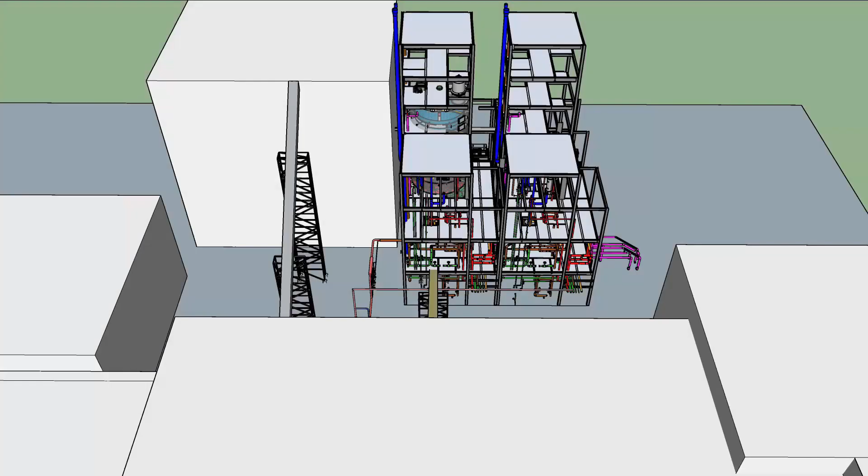In this episode, we'll be focusing on aspects within the extraction plant, from heat exchanger optimization to steam system improvements, all of which came to light through the insights and power of CLARITY. A focal point for CLARITY in extraction was a shell and tube hex that was one of the largest consumers of indirect steam in this stage of the process.

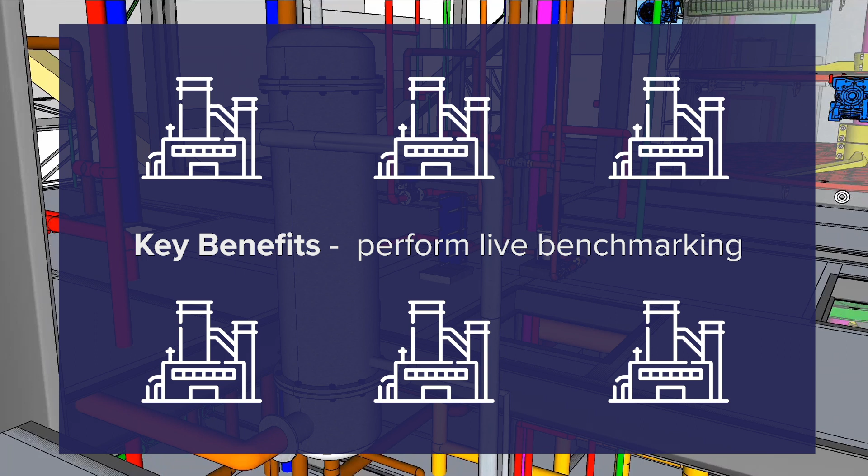As CLARITY was rolled out over multiple sites across this client's organisation, one of its key benefits is being able to perform live benchmarking. Before CLARITY went live, Crowley Carbon targeted big energy users like this hex and installed additional instrumentation to capture an in-depth view of the process. This involved installing a dedicated steam meter alongside pressure and temperature sensors before and after the primary and secondary streams.

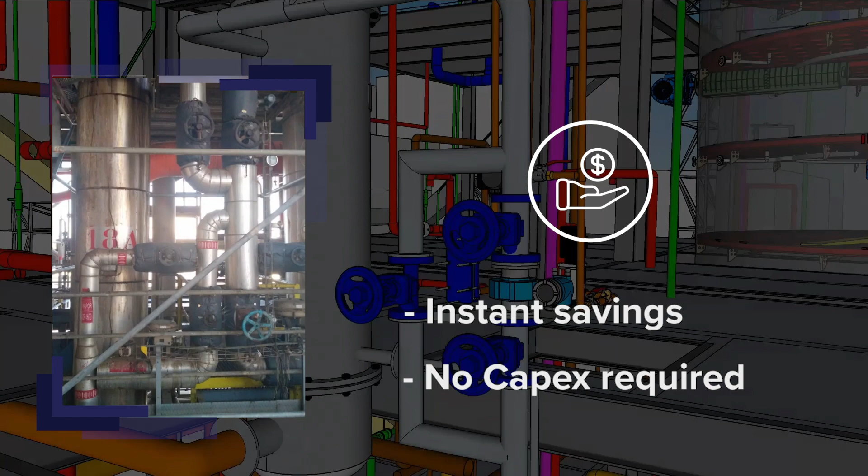Immediately when CLARITY went live, instant savings were realised with no capex required. It was found that multiple sites with the same product throughput were consuming different levels of steam via the hex in question. After just a short analysis, it was found that each site was controlling the micella stream at different pressure set points through the hex. The site with optimal running conditions was immediately replicated across the other sites, and the lowest savings achieved from this action was €53,276.

By modelling the process around this hex and trending how it should be operating, it was found that there were further savings to be achieved as it was still consuming too much steam. The hex was increasingly becoming fouled between shutdowns where it would ordinarily be chemically cleaned. With the insight of CLARITY, we were able to pinpoint when and how the hex was fouling. On average, these circumstances only occurred 5 times a year, but had huge impacts on steam consumption.

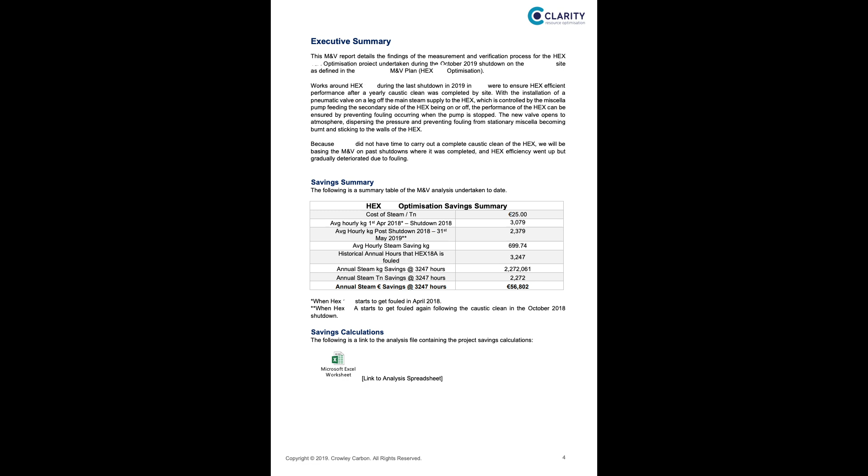It was found that when the pump supplying the micella was stopped, the steam supply was simultaneously stopped. This led to a pressure buildup within the hex, which burned the stagnant micella to its walls, decreasing the surface area available to heat the micella during normal operation. Because of this, an increased level of steam was consumed to reach micella temperature set points. To negate this, a pressure relief valve was installed and would open to the atmosphere when it received a signal from the micella pump that had stopped. The minimum cost saving on each site for this action was €56,802.

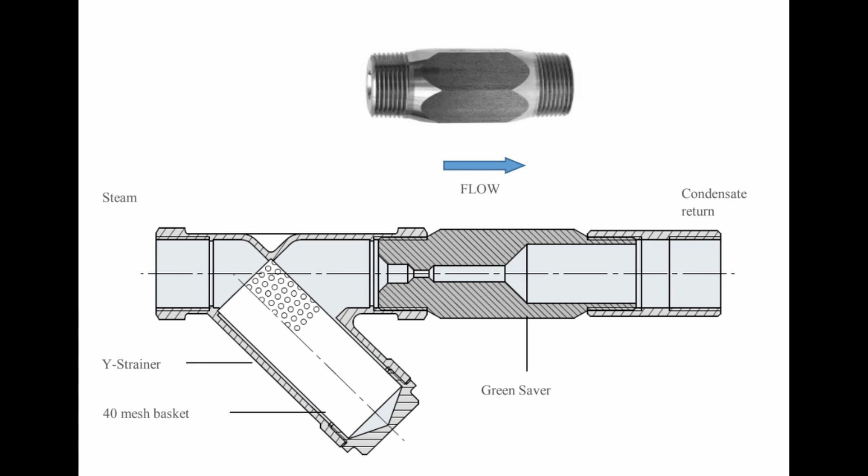Lastly, on the hex, as with all the steam users on site, the mechanical steam trap was removed and a venturi trap was installed along with a bypass circuit for easy maintenance. Most importantly, a blowdown valve was installed on the Y strainer protecting the venturi steam trap. We find that on the majority of sites the steam system may be suffering from corrosion wear and tear. To help keep the system clean and increase performance on indirect steam users, a maintenance schedule around blowing down these strainers will dramatically increase efficiency. After a couple of months, this maintenance frequency can be reduced as the system becomes cleaner.

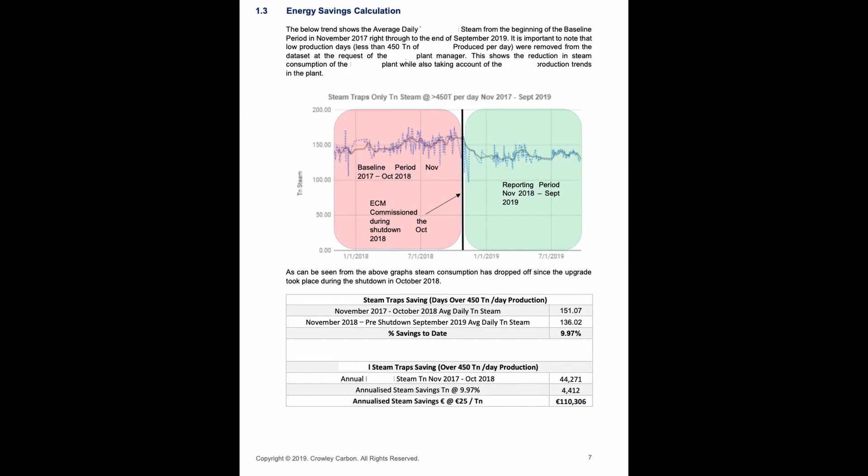Just in this section of the factory, with the removal of mechanical steam traps and the installation of accurately sized venturi traps, savings of €110,306 were realised. As with all the energy saving measures taken, they can be scrutinised and followed live on a dedicated CLARITY dashboard.

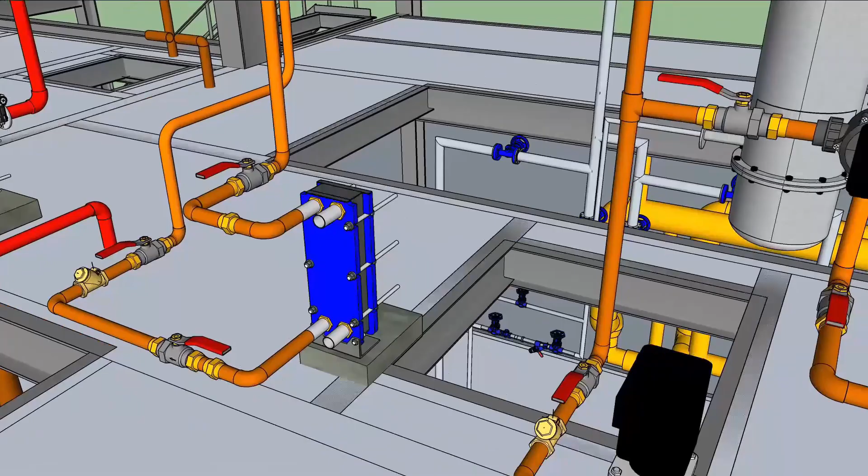A complete thermal energy study was carried out through CROWLEY and it was found that there was enough waste heat available to satisfy some of the heat demands in extraction, and by doing so decreasing steam use. New hexes were sized and installed in the miscella stream, which saved the plant €81,301.

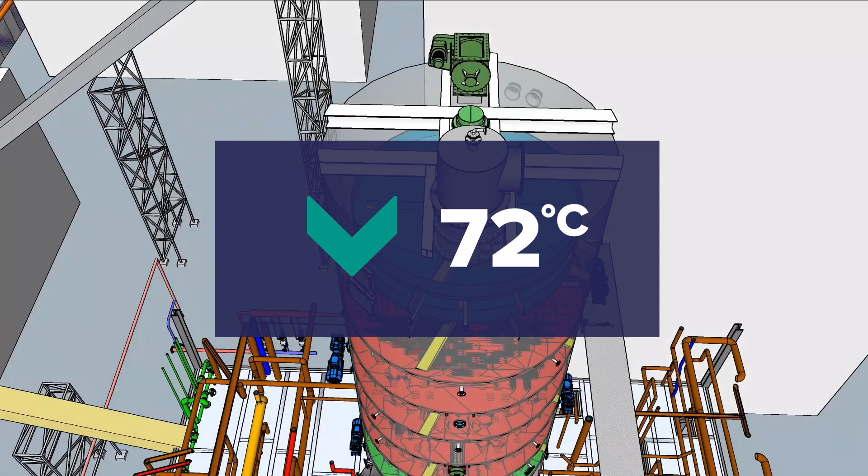The largest user of steam in extraction is the toaster, as it consumes direct and indirect steam. Again, with the ability to easily benchmark across sites, a decision was taken to lower the dome temperature set point from 78 degrees Celsius to 72 degrees Celsius. This set point was reduced by 2 degrees Celsius every 24 hours while CROWLEY was analysing the parts per million of hexane in the meal output, ensuring it remained within acceptable levels. From this action, €326,726 was saved.

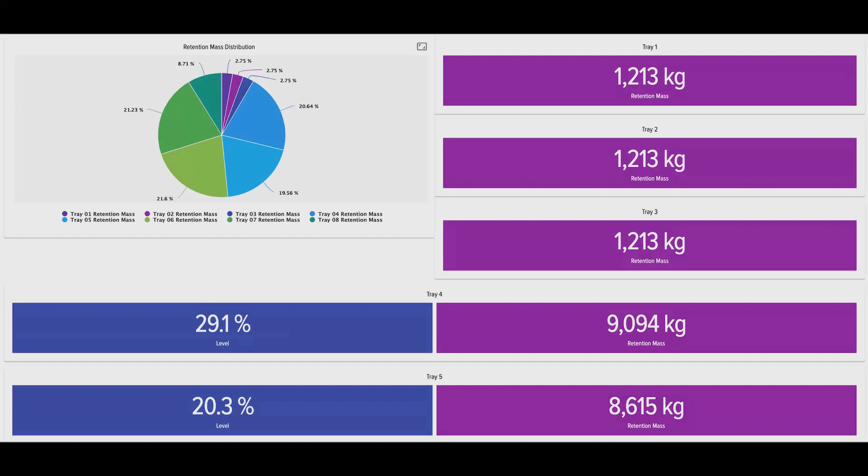Additionally, through CROWLEY, we modelled the residence time taking place within the toaster and optimal steam consumption during the process. This led to many insights. Like so many other users of steam, the toaster was consuming in excess of what it should. With this knowledge, our engineers investigated further. After carrying out simple ultrasonic tests across the steam traps, it was found that the majority of them were not operating within their design parameters.

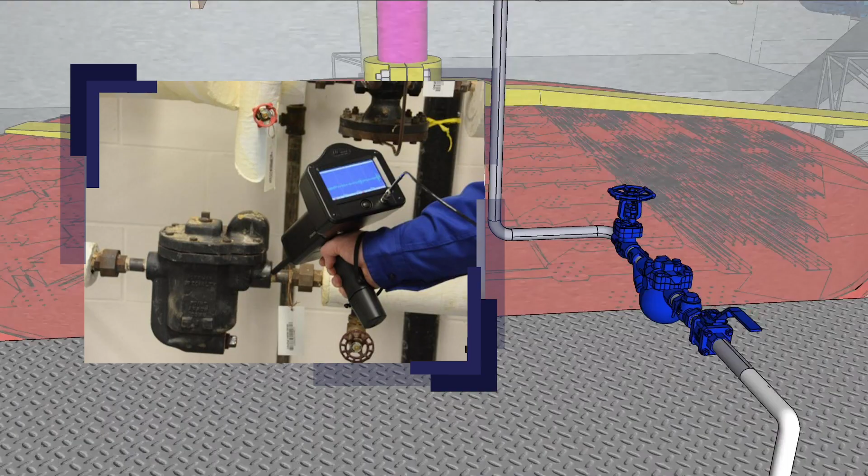Because the toaster is such a fundamental part of the process in extraction, the customer was at first reluctant to carry out any changes. However, with the insights from CROWLEY backed up by further tests carried out by our engineers, they felt comfortable allowing us to design and install new bespoke venturi traps to replace the site's traditional mechanical traps. From this action, €123,811 was saved.

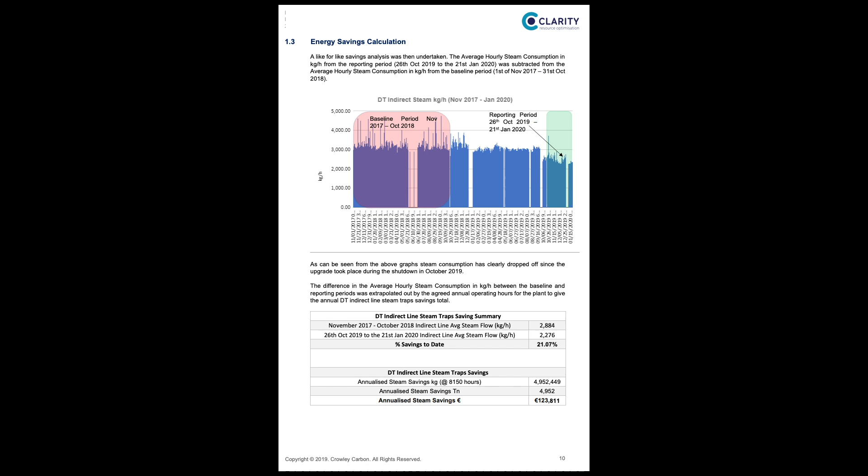Another insight that CROWLEY was able to accurately provide from analysing the extraction area of the factory was that not all of the condensate being produced was being returned to the degasser in the boiler house. This led our engineers to investigate thoroughly. All of the condensate generated was fed to a large collection header which was serviced by a number of pump traps. This technology is based on motive steam driving the collected condensate back to the boiler house.

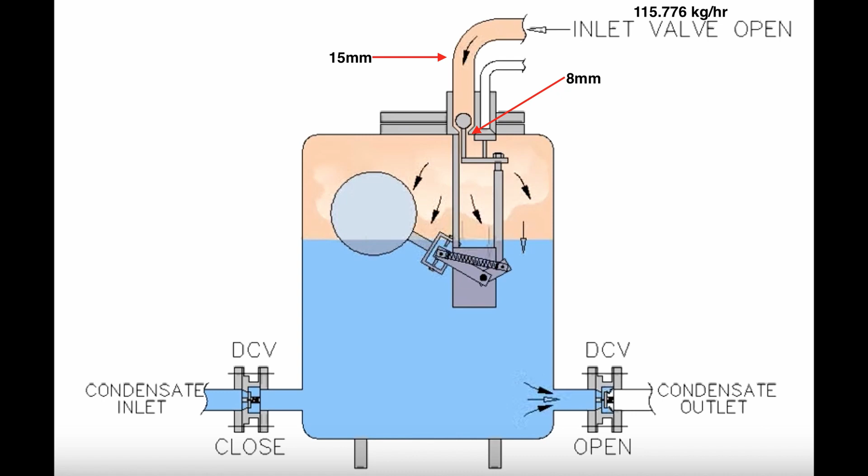The large pump traps would fill, and at a certain level steam would be introduced to drive the condensate to its destination. The issue here was that steam was always engaged, which led to the majority of it being vented to the atmosphere. To negate this, a new design based on the loads of this section of the plant was implemented, incorporating a condensate receiving tank with a duty standby electrical pump set. This simple action saved the plant €36,570.

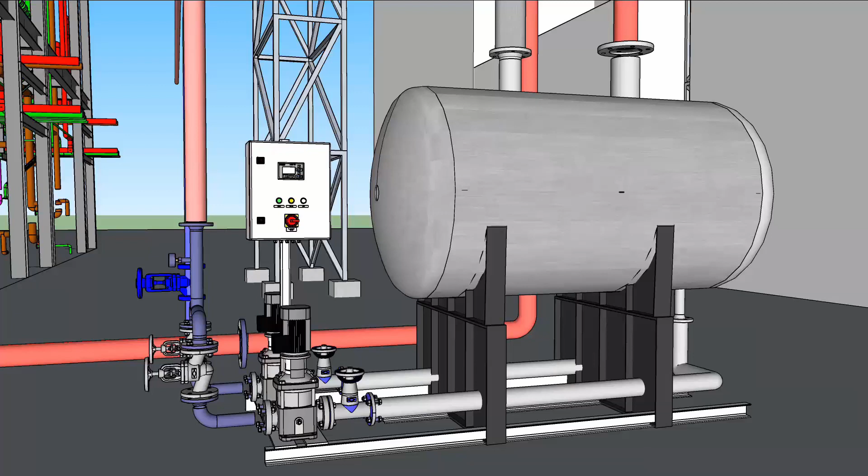CROWLEY fulfills many functions, one of which is the ability to uncover optimization opportunities while giving the client all of the necessary feedback required to make a confident decision on the feasibility of these opportunities.